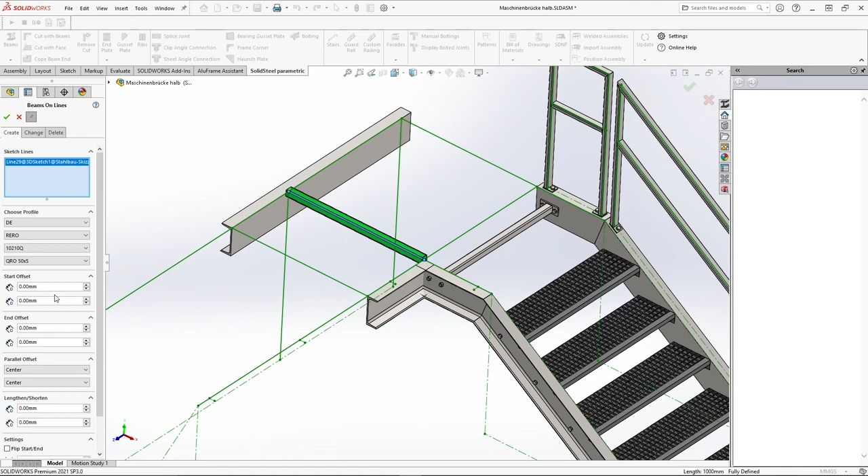For the supports I also use rectangular tubes again, but this time a different size.

So far so good. Next we come to the connections. Here we want to connect the parts by using end plates.

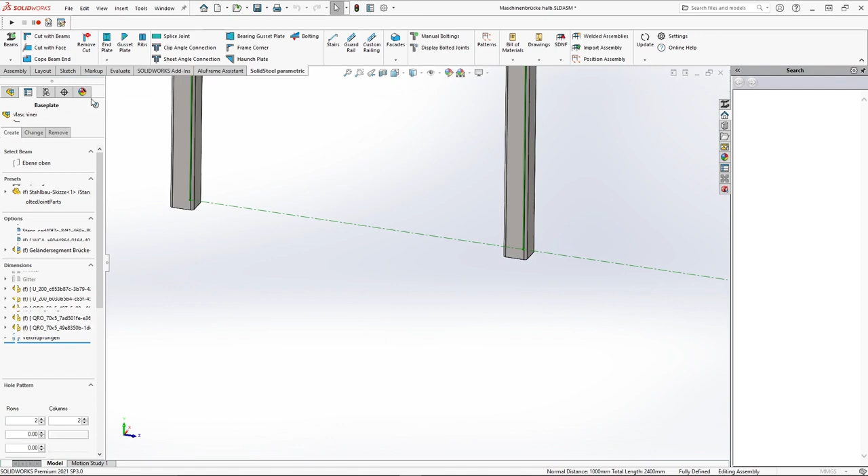We start at the base of the rectangular tubes with the base plates. To do this, we just have to select the appropriate profile, then we get our preview.

We can change the offset direction and select the plate from our self-learning database. I have already prepared the fitting base plate in advance.

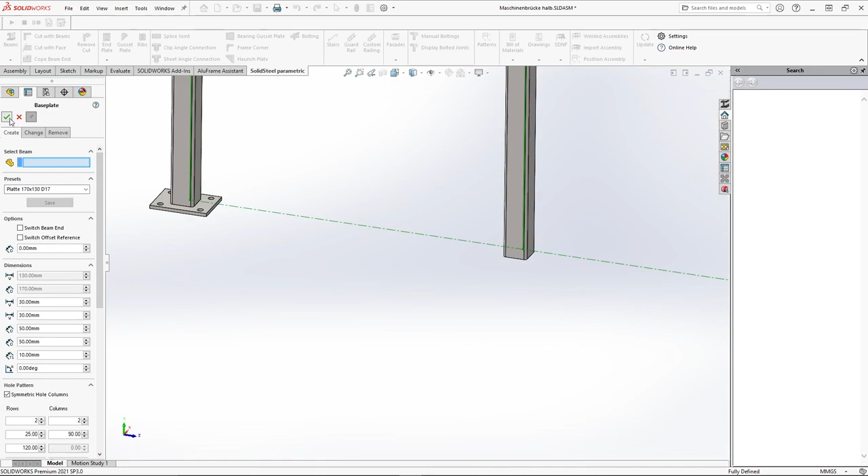Next we do the other end plate connections with the normal end plates function. As before, I'll use an end plate from our self-learning database.

Finally, we want to connect the stair stringer to the U profile with an end plate. We can simply select the profile and the connection surface and the software will do the rest by itself.

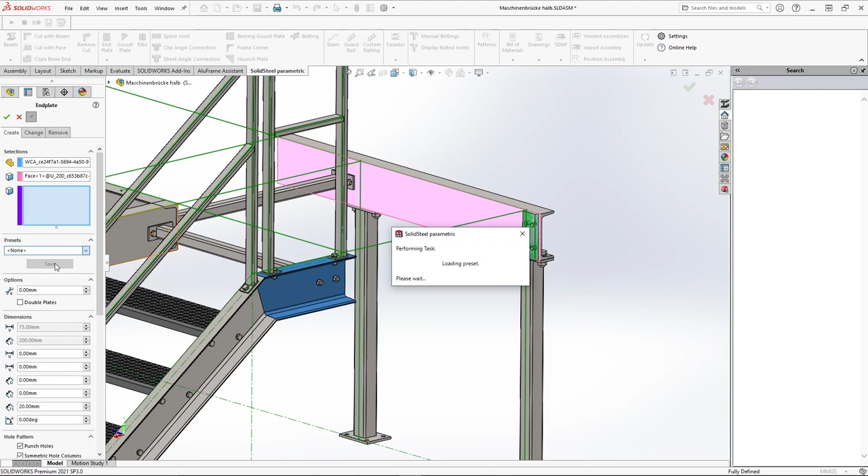We select an end plate from the settings again, confirm the whole thing, and the software has automatically extended the profile here to the desired point.

So far so good. That happened pretty quickly. We don't need to worry about the railing that is too short. The SolidSteel update function does this for us fully automatically. Let's take a look at that.

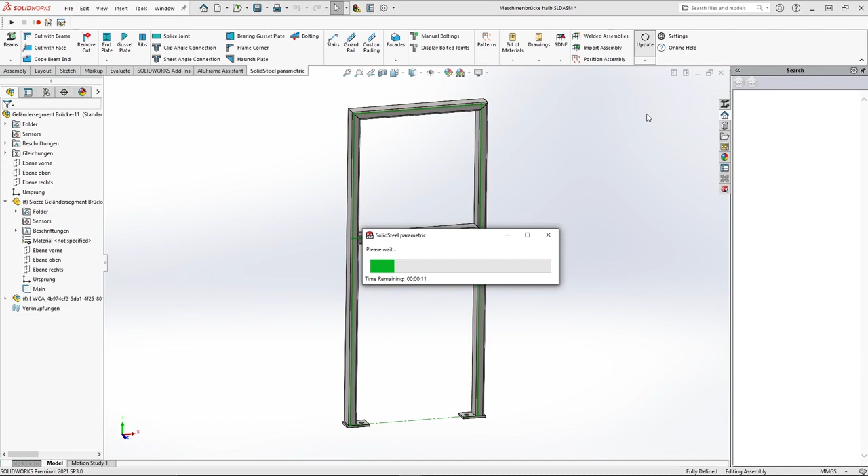It's amazing how fast it works. Next we turn to the other side, to the next section of stairs. For this we use our staircase functions.

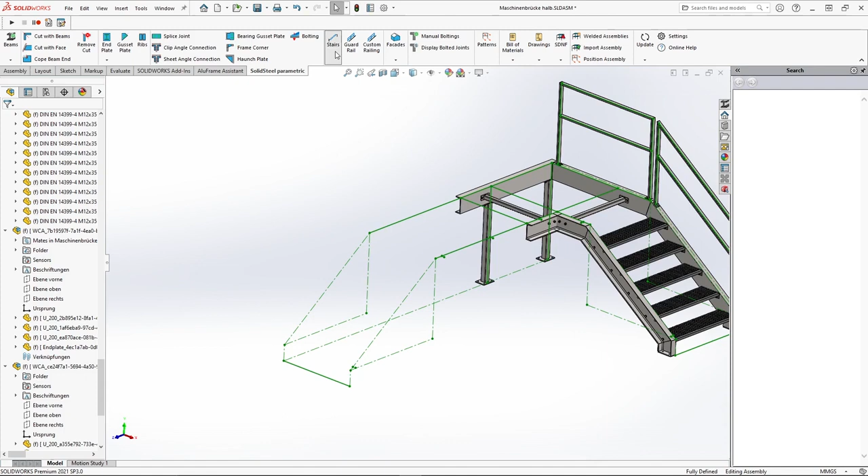To place a staircase, after starting the function, we simply have to select the start line, then the end line, and the software creates a direct connection between these two lines and a preview for our staircase.

The profiles and the stairs are already pre-selected. That means I can now start the more detailed configuration. And here we only have to take care of our expansion now.

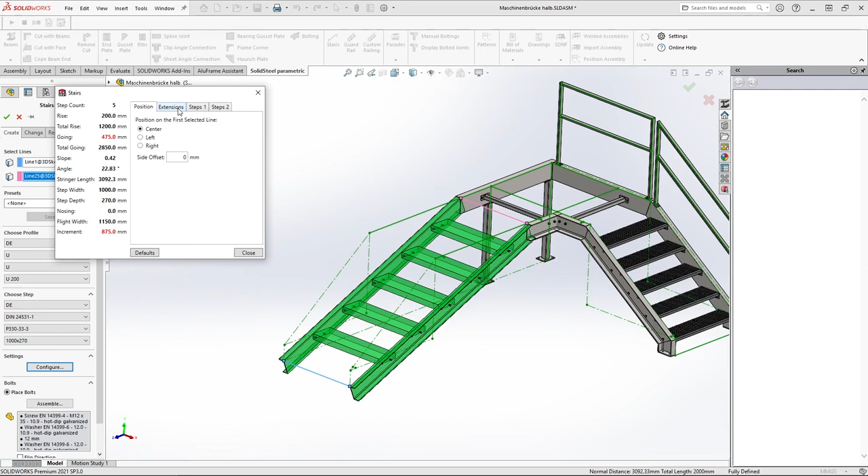At the top we need a horizontal extension with a length of 1.5 meters. And at the bottom we need a vertical connection with a length of 200 millimeters.

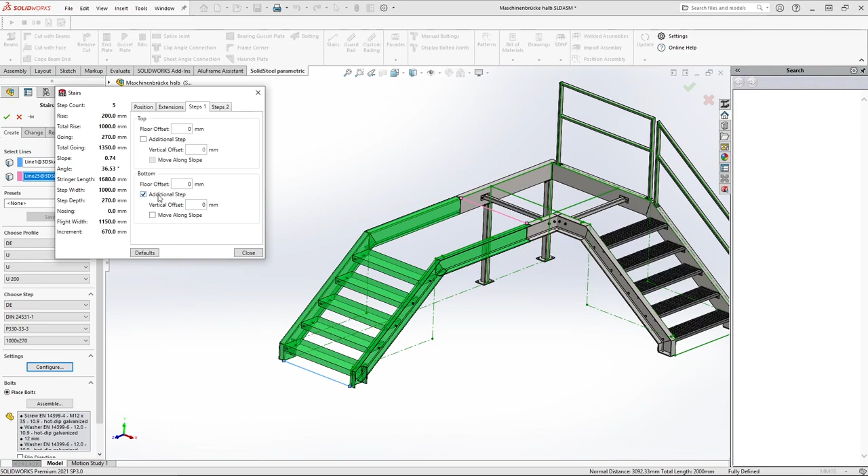In the tab for the stair steps we can now add an additional step at the bottom to close the gap to the floor. Then we confirm this and watch the software create the stairs.

Quick task again. To connect our stairs, we simply use the miter end plate function to place a miter plate between the corresponding profiles. The plate is from our database again.

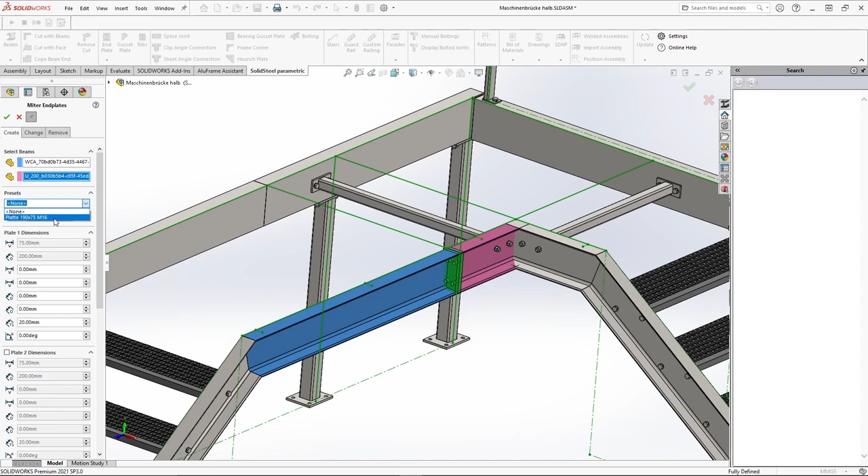If we already work on the corner, we see that we still need a miter cut between our profiles that meet in the corner. To do this, we simply use our cut functions to create a miter cut between the two profiles.

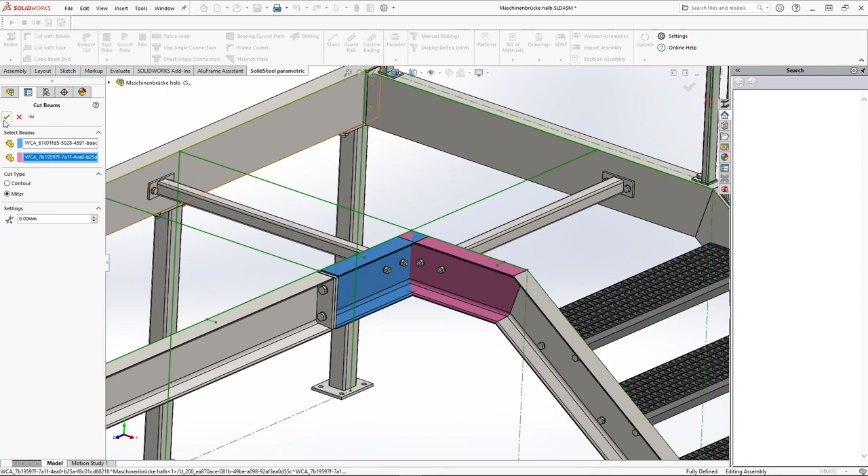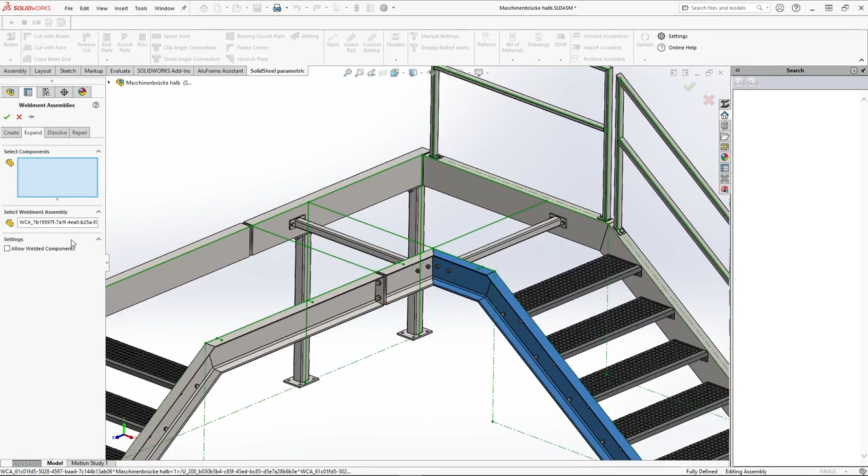Next, we need to take care of getting our miter profile into a proper welding assembly. Therefore, we use the weldment assemblies function, and here we can add the parts to an existing welding assembly using the appropriate selection.

Now we have restructured our assembly with just a few clicks. Well, next we add railings to our assembly on the left. For this we use our function custom railings.

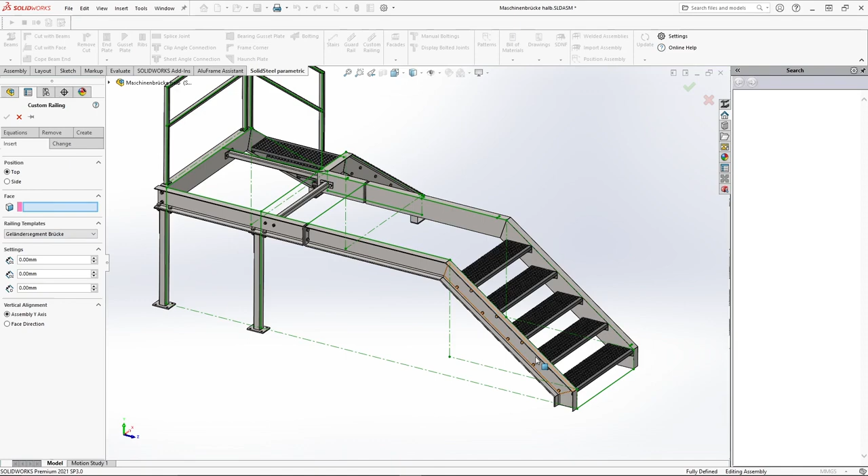We can choose from pre-designed templates and can simply select a face and an edge of our U-profile to place our railing.

In addition, we are now using offsets to move the start and end point, so the railing is placed in the middle of the surface.

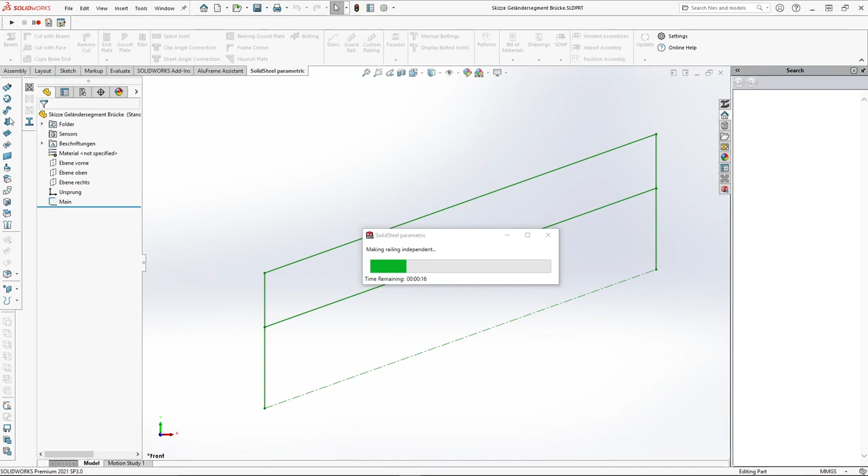After confirming, the software opens the previously selected template and makes changes to adapt it to the current situation.

I now repeat the whole thing on the straight surface with the same template. Then we can see how the whole railing adapts to the new situation and how it creates a second variant of this railing in our assembly.

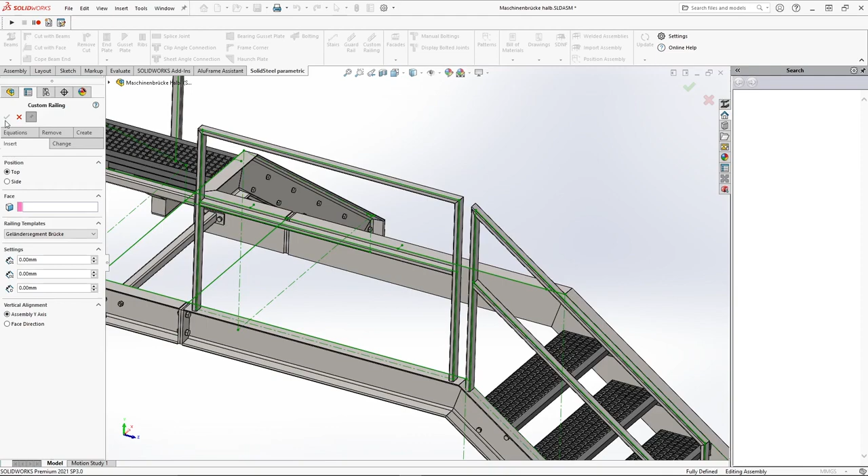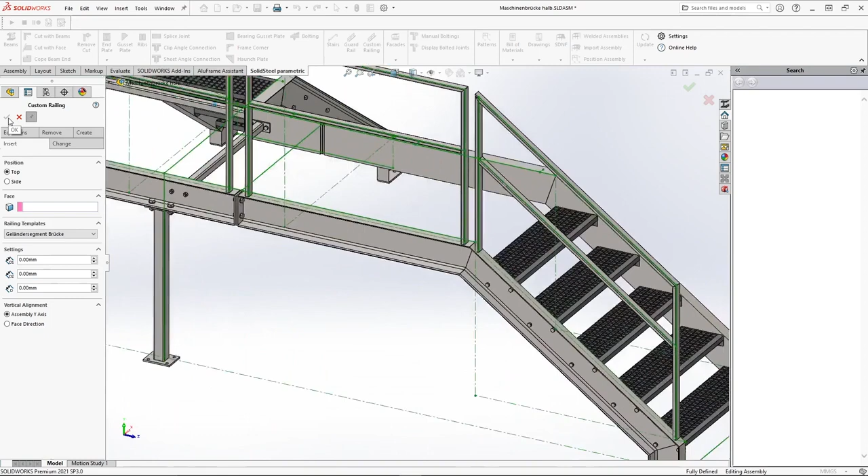As we can see, we can save a lot of work with the railing function. We only have to design a handrail assembly once and can use it as often as we want in different situations. Next, we connect our railing assemblies to our existing construction.

To do this, we simply use the end plate functions again. You have seen this before, so we do this all in fast forward.

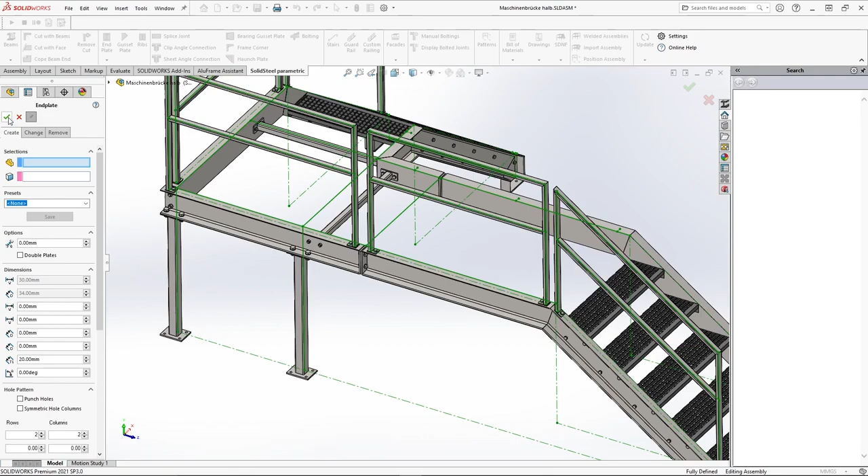Well, that was pretty quick up to here and it looks pretty good. On the opposite side we now have a problem because the whole thing is a bit too narrow for our custom railing function. For this I thought of something else: we simply use a second SolidSteel assembly that I created in advance, which represents a railing across the corner.

We will now insert it with the import function. For this we simply select the corresponding assembly and it's automatically inserted in our current assembly as a copy with the appropriate settings.

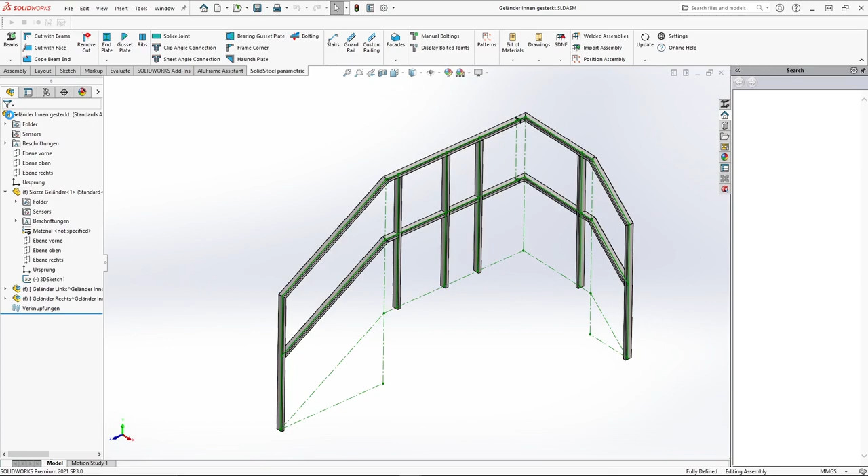We now have both assemblies together in one, and the next thing we have to take care of is the positioning. A function for this is of course integrated in SolidSteel parametric. With the assembly positioning function we now have the option to link individual sketch points to one another in order to move and adjust the sketch.

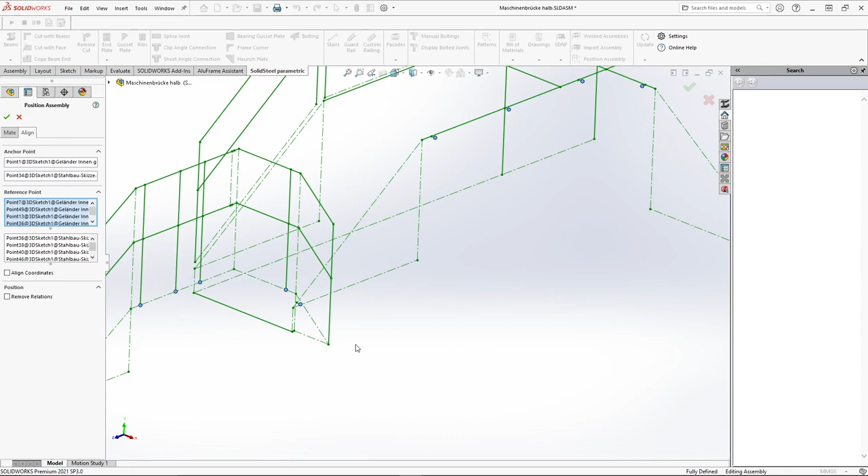We are now looking for pairs of points from the two sketches to link them together. After we confirm, the software does the rest. As we can see, the sketch has now adapted automatically, and next we have another job for our update function.

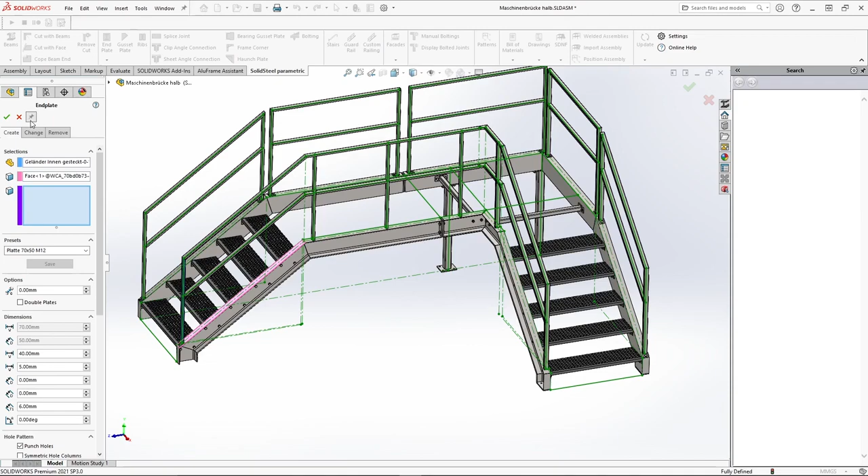Great! And our railing is ready for this side. Here too, we reconnect the railing with our stairs using the end plate function, but you already know it from the first side, so we sped the part up. Well, some clicks and we are back in the assembly and all railings are fully assembled.

Next, to complete the assembly, we'll add a few more gratings. For the gratings, of course, we need a support.

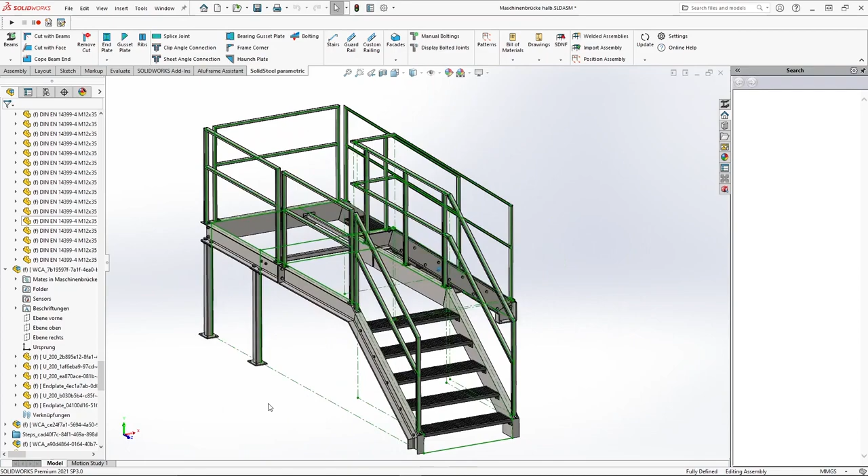For this, we add a few L profiles to the assembly. As we can see, it is also possible to add further profiles to lines where a profile has already been placed. That's why we can simply place the L profile in addition to the U profile and move it to the right place with the appropriate offsets.

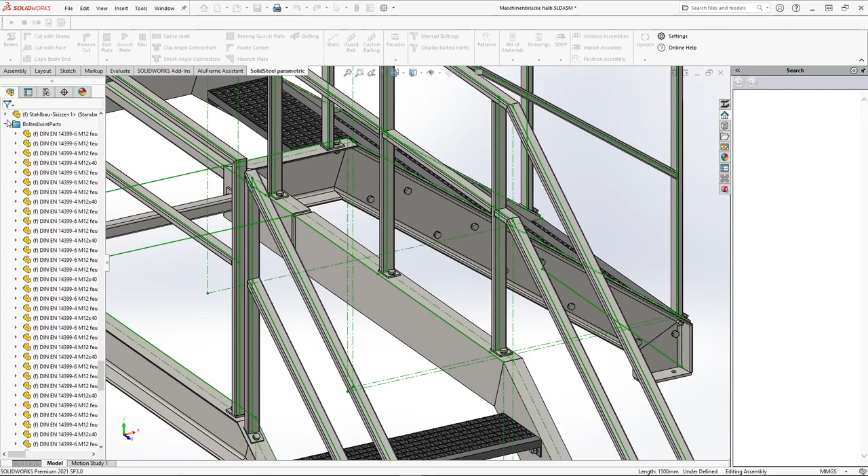I placed the other L profiles in the same way and now show them. Then we can just add our grating straight away. We finished our small maintenance platform and I think it was pretty quick.

In the next section of the video, we'll look at what we can do now. First, we can assign position numbers to our assembly in order to create the bill of materials and drawings.

I've just started the position number distribution via the task pane. The process behind this can take a while. Well, now it's done and here we can see an overview of our position numbers.

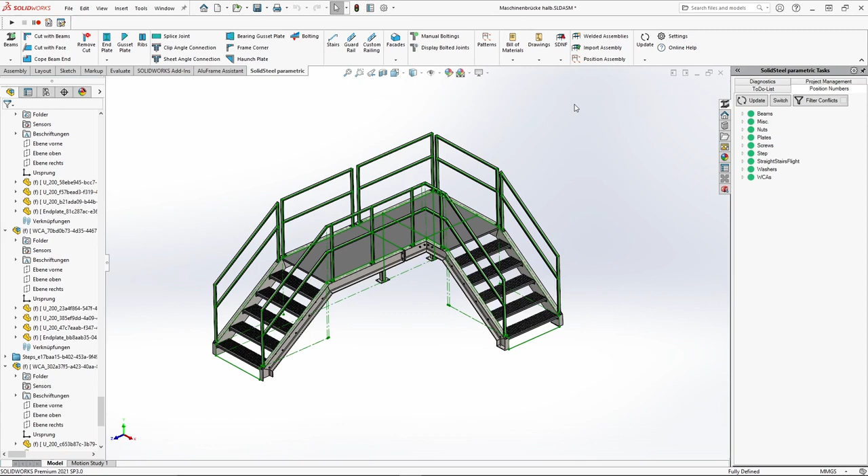Immediately afterwards, we can now create an Excel parts list using the export function. We can choose from many different templates in order to create different list types.

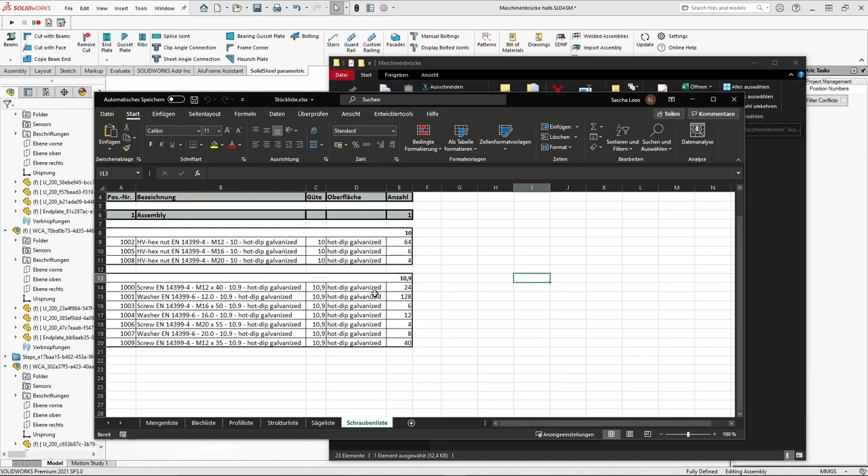So, let's just take a look at the parts list. I used a template that creates different types of listings at the same time. For example, on the first page we see a list of bolts. Also a saw list. Here we can also see the different cutting angles of our stair stringers.

In the structure list we can see the assembly structure with all of our welded assemblies. In the profile list we have sorted profiles according to the profile type. On the sheet metal list we have the same for the sheet parts. And last but not least, on the quantity list we can see all the individual parts one below the other.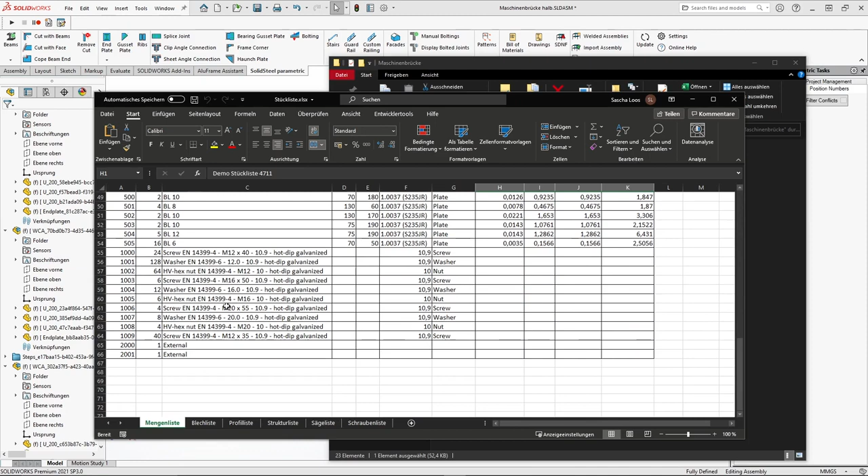Finally, we will now create a drawing to show how we can have Solid Steel create fully automated drawings. For demonstration, I use one of the stringers and all I have to do is select the template, enter an order number and choose a location to save the drawing.

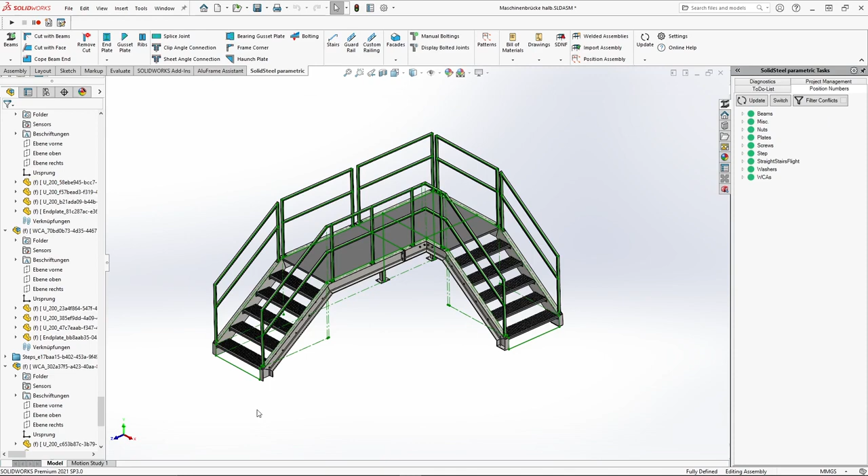The export of the drawing is a quick task, so I'm going to open the drawing to take a quick look at it. As we can see, all the dimensions we need to manufacture the part have been automatically added. We can of course add further information as we like.